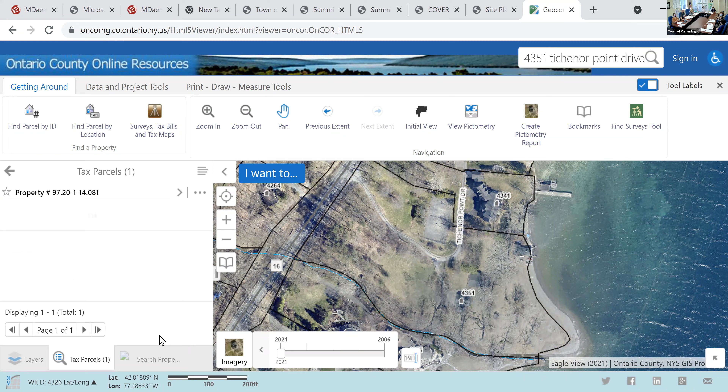Well, if it's holding the slope, they need something to hold the slope in place. No, it's trees. It's like it slopes down and then it's a little bit level and then it drops down again. So the trees are all around. Yeah, that's good. I don't think there's...

He's concerned because there are a few trees that look like they might be beginning to die off that are very close to the property line, and below them are just three big homes. And he's concerned that they're gonna fall. That's good that he is. Ash trees do tend to die and then the limbs just give way without much. They shed kind of from the top.

You can zoom in really good, and you can see the homes that are below him. There's one that has solar panels on the roof and an extensive patio. People put a lot into that home. Let's see, theirs is 3663, right at the lawn is where the property goes down. So if I were to make a guess, as they built this it was unbuildable. So that again is their subdivision, their conserved area.

Right, so you have both properties. So it really is that swamp. It goes all the way down to the cul-de-sac circle, right about there. All through here. It would be helpful to see what the deed restriction language is. Yeah, we should probably pull his deed and see if it says anything.

Well, the planning board approval says that any work or any upkeep or anything that happens back there has to be approved by the planning board. And I think that's why it got triggered anyway. We can ask the real property folks to send the deed, just to see what it says in regards to that conserved area. There might be some wording in the deed.

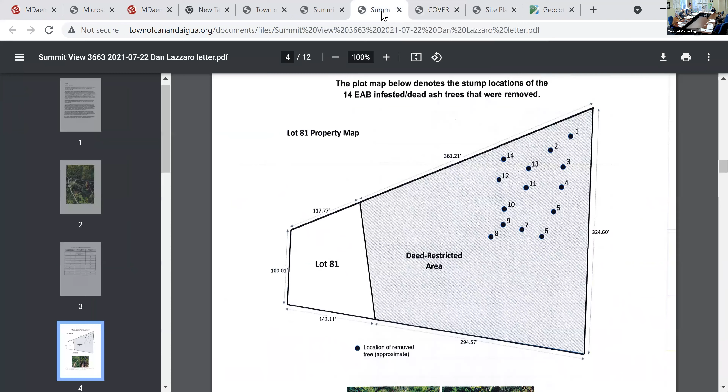So then what's the recommendation for that one, Pat? Well, I recommended, since we don't exactly have a set native tree regulation for our board yet, to see the suggestion of his landscaper, because that is quite an extensive report. If you pull up that report, you can see where he is making suggestions as to what type of native trees would be a good idea to replace. There it is. Walnut, red oak.

If I was going to plant something that would get big in a hurry and be pretty stable, I'd throw in a few tulip poplars, because they grow really quickly and replace canopy to fill that in. They're still pretty durable trees and native, so they will grow a lot faster than the oaks. And they were suggesting to plant in the springtime. They probably have a better chance of survival too with the deer that are back there.

So we're adding the tulip poplars as a suggestion? You guys would be okay with that? Yes, I would. They do grow much more quickly than oaks. In addition to what's being suggested by the landscaper, to replace what's been lost and what was taken down.

What about suggestions that they are caged or tubed? There's quite a few deer in there too. Yeah, to keep them safe. Some saplings might become enjoyed by the deer; they won't last long. Yes, we want to recommend protection. Good thought. Plus, there may be several hundred in that area as well. He does have little saplings growing on his property from the black walnuts. I took a picture or two.

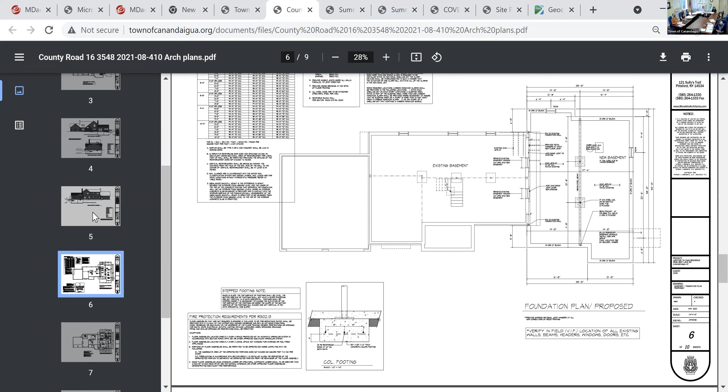So as you can see, here's the proposed addition. Sorry, guys. So the addition is not going to exceed the current height of the home. Elevation will match. Sheet 5. Up one. So this is from the back. That's the rear. So this is where that existing deck was, and it will come out of here. Looks like a basement window. By depth, it looks like it could be a full basement underneath.

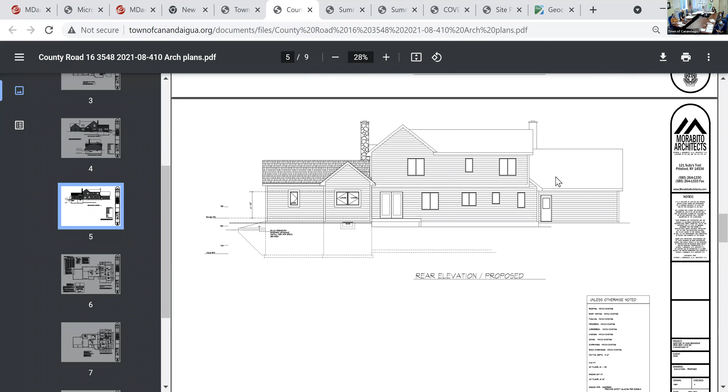So that is the rear elevation, and again, there's the front elevation. And so to answer that question, it looks like no windows on that right side then, like you had mentioned, Linda. Right, this would be the north elevation, so no windows on the north elevation of the property. So that's the north side, looking at the new addition part right there. All right. I think that's about it.

Let me pull that up on OnCOR. So as you can see, this parcel here is family. They are just taking a piece of that. And this lot line will be adjusted slightly to fit within the setbacks for the addition and the property line, because the line is pretty close. It's right on the edge. So they're just taking a little piece back there for the lot line. That's just a little standard thing.

Swale area will come in and will tie right in. So it looks like we have some swale there that continues down through here. So if I can find my... no, here's some extra copies I made, yeah, I think I have some right for them.

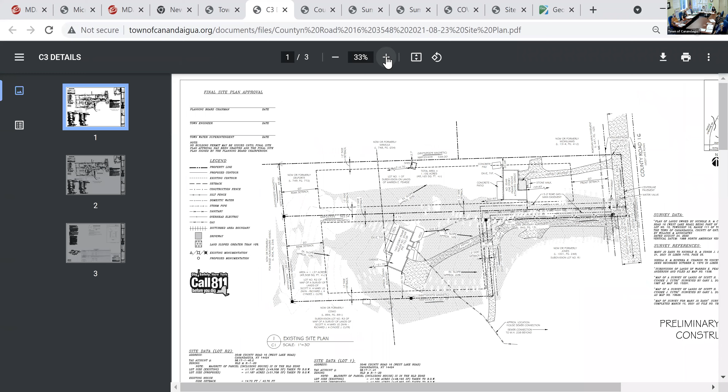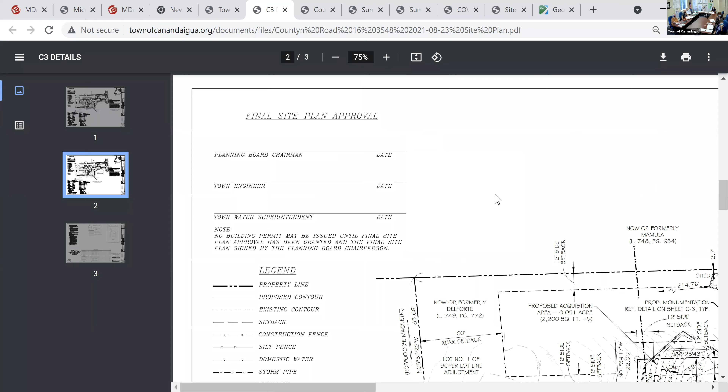So which one do we want? One of them's probably existing conditions, and then there's probably the design page after that. That's two, our existing. Doesn't look like much is on that one. Final site plan, that's everything they're planning to do. You can see the grading. Well, the lot line there is, oh, I see. What we were looking at before was the OnCOR map, which has the old lot line. The new lot line has not been updated on our report.

I see. Okay, so you've got this little jog coming up to the north to accommodate this. And is the new swale entirely within this property? Yes, so they're not adding anything onto the neighboring property. I would say it's an existing condition that they are continuing to use, because regardless, the drainage from this property taps into the swale on the adjoining property. So where does the swale end up at the bottom of the hill? Where does it go into West Lake Road? Whose property is that on? Is it on this?

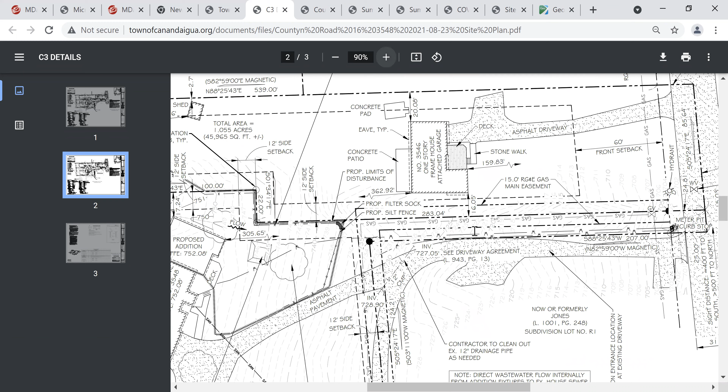Wow. Great question. It's a shared driveway, right? So there's a right of way or something. The driveway's right here. Here's the other driveway. So it comes right... Driveway agreement. Go under. Yeah, it could go under. Might help to look at the photograph again. We'll look here, because I didn't get anything from the road.

I still have a little bit of a cough. Okay. They gave me 2 more.

So here is the neighboring parcel, and here is their parcel. And it runs through here, I cannot see. That's fairly steep right there, right in that area. So it comes down, it might go underneath here.

So I don't know if it goes underneath there or where. Well, I think there's a ditch on the north side there, that's where the drainage is. And then eventually it goes down to Butler Road and into the lake.

What's it say on the soil and erosion control paperwork, that application portion, what is intended for the runoff? It should be in the soil and erosion app.

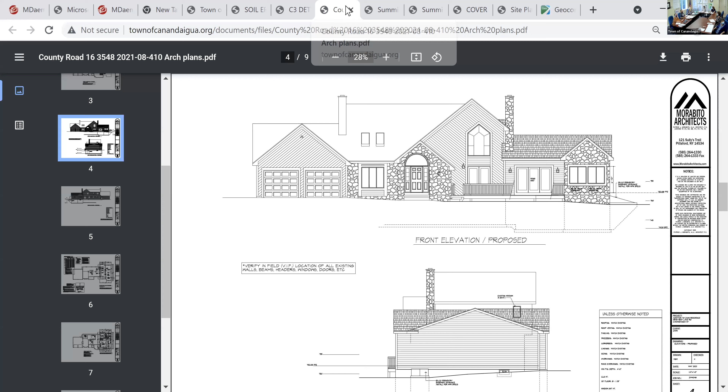Of the amazing people here who deal with my last minute things, my last minute oh-no's - it should be in there. When we get into it, I didn't see a house plan on that one, unfortunately. Can we get a house plan? There is not one yet, so I'll just kind of be able to go through the information on this one.

So this is a single stage plan for a single family residence, 3895. And this is... Lee Harder is the one building it for me, yeah, and this is gonna be his, for what the explanation is.

That dated 20th should be 8.23. That's the right one, okay.

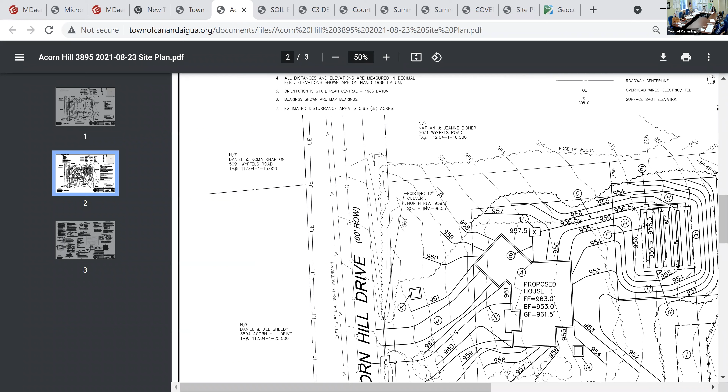So, yeah, actually, the house is on there. Well, yeah, but we don't have architectural elevations of it. You can see it's not a huge lot - it's really the last buildable one in that area. So this is his proposed home: attached garage, septic system is shown here on the back portion of the property. So that's what we're looking at.

So there's a gentle slope, it's about a 10-foot drop from the front of the property to the back, so it's about 8%. It has moderate drainage - low to moderate drainage - but one concern is the erosion. It's not too steep though, and walking it, it doesn't feel very steep at all, so there aren't any huge concerns or red flags for that.

So the scope of the work is to clear and prep the lot for a single family home, including their silt fence and washout area. There will be a dry well installed, right here, to take all of the drainage and all of the water from the roof line right into there - so that's the dry well. And it's well within property setbacks, and well below any lot coverage limits. I want to say that is their washout area, by the road, in the front - right there. Okay.

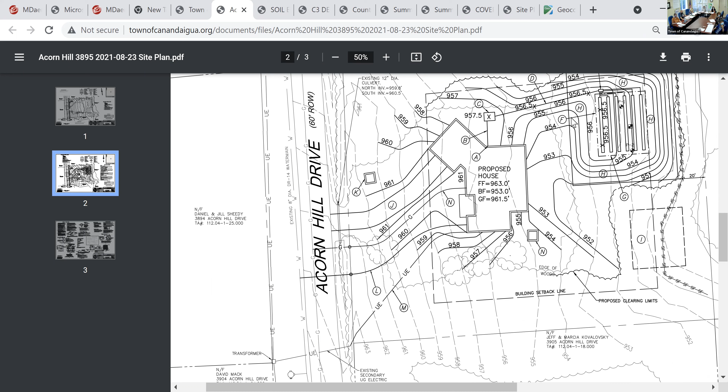So let's go to some pictures.

All right, so this is taken from the road looking into the property. There are a lot of mature trees that ring the property. In the area in the middle, this is the back septic, where they're proposing the septic along the back. You can see that they've cleared that a little bit. It's mainly just scrub and underbrush. There are some larger trees that have been taken down in years past, and from the looks of the stumps, they've been there for a while.

Again, this area here in the middle is the area where he's proposing the home. Now, you wouldn't need to clear any of the trees. You can see there's a lot of mature oaks all the way around. Hence the name. That's a good thing. Hence the acorn. And when the wind blows, the acorns fall.

And there's a view looking to the south on the land on the property as well. It's a nice lot. Yeah, it is nice. A lot of mature trees going along that. Go ahead, deer heaven. Yeah, they like those acorns. And there's some of the trees that you can see that were taken out. Yeah, and that's not new. That was a while back, from the looks of it.

Is this on the downhill side of Acorn Hill Drive? Yeah, it's on the east side, the lake side. Okay. And as you guys know, Acorn Hill is a tough spot because of their elevation and because they don't have sewer. They're so close too. I know, they're surrounded by sewer on both sides. If you ever want to talk to anybody about sewer, go talk to people who live on Acorn Hill about how there's sewer here and there's sewer here, but not sewer there. Yeah, or talk to George Barton, watch him wave his arms.

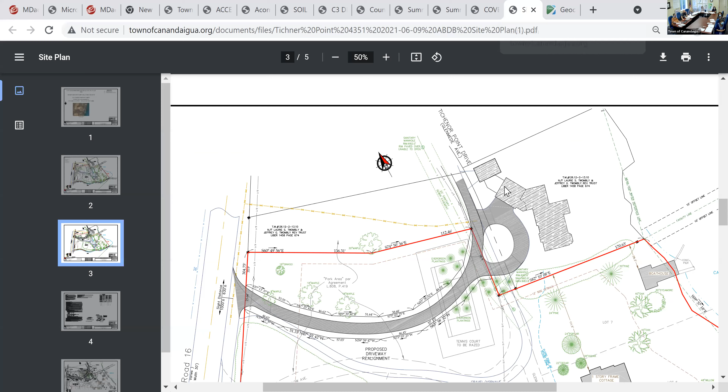So the site plan has this new road coming up more or less along the line between the southernmost lot and the second lot to the south. And then it kind of hugs the back of the parcel and ends at the northernmost one. 3 of the lots are right around 1 acre and the 4th lot, the northernmost, is about 1.5 acres. So I did take some pictures. You want to go to those and just see what the terrain and the vegetation is like.

This is looking to the north. And so you can see it's kind of low scrubby trees, nothing you would call mature woods, although on the maps, the open space plan, it does call it successional northern hardwood, but I would say if that's what they want to call it, it's a very young northern hardwood. And there's a lot of just sort of weedy trees there in the, let's say 20 to 30 foot height range.

The next photo shows the clearing, the initial clearing for the road. Well, no, that's looking south from in front of where the statue is. And then the third photo is from the road looking up into the clearing. They've only gone this far. They haven't, unless I just can't see it, started the other part of the clearing yet, but they're making a very wide swath, way wider than they need to for just a 14-foot wide driveway. This struck me as more like a 50-foot clearing.

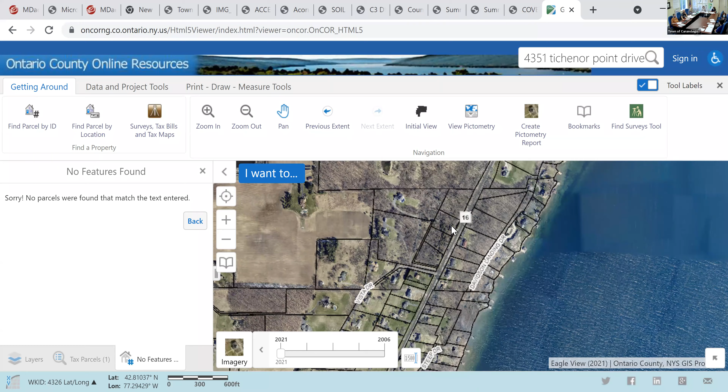But again, that's just a guess, and I think that the planning board should bring that up and try to establish some ground rules at the outset, if we would like to encourage them to retain some of the existing trees. They should be marked, they should be protected, they should be identified on the site plan, and they should obviously allow for the house construction to take place. But if the town would like to see existing trees retained, this would be the time to bring it up.

So to go through the draft here, these 4 lots have a dense growth of successional shrub and immature hardwood forest, farmed up to the mid-20th century. I'm pretty sure this was farmland up to the 50s anyway. 3 lots are approximately 1 acre. The 4th is 1.5. The proposed field access road passes up the slope through the southernmost of the 4 lots, then extends to the north across the high end of the other 3.

A 14-foot wide gravel drive with drainage swale and check dams is proposed, passing through about 100 feet of a steep slope area at the road end, and then up to a flatter area at the upper end of the sloped site. A swath within the southernmost lot has been cleared already.

So some suggested questions for the planning board. Is this the proposed path of the future common driveway? And Shauna says yes. What is the intent of the clearing limits line? If the intent is to clear the site beyond the clearing limits indicator, what provisions are proposed for erosion control?

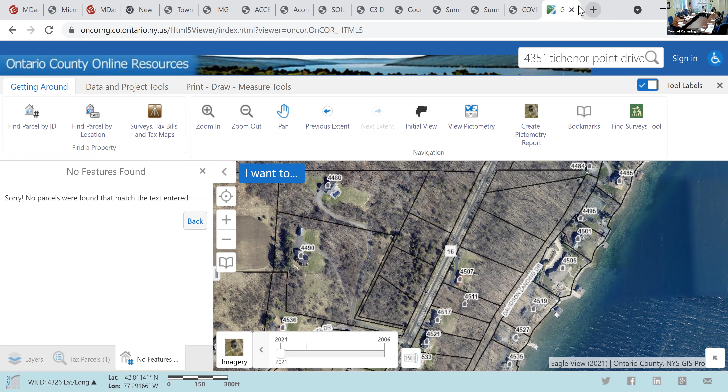Any volunteers for October? I have such a good idea for November, so. Yeah. I'll work on it, but if anyone else wants to chime in, I'll be accepting of anything anyone wants to send my way. Okay, so put Pat down for that.

Okay, for November, I would like to do something on No Child Left Indoors. Oh, great idea. Have you read Last Child in the Woods? No, sounds good. That's a good one. That's such a good one. So NCLI, No Child Left Indoors. A little bit different than NCLB. Yeah, Last Child in the Woods. I'll look for the book. Let's get them outside.

Right, outside. And then once we roll through fall, once I get through the start of school and get my legs back under me, I'll update composting and recycling for the fall. So I'll throw some leaves and pumpkins and Christmas trees in there. Why not? And the chipmunk. And as part of the biodiversity activity, I'm going to be taking these and putting them in each one of the science rooms at the middle school.

Oh, perfect. And I'll even send them up to the high school, because I'm sure there are some high school kids, and I'm sure Dave Platten and his ecology and outdoor classes would be all over this. So we'll get these up there and put them in the classes, and also the spotted lanternfly, just to make them aware. We can put some of those around in there as well. That's probably the place in town that's gonna get the most eyes on it. Yeah.